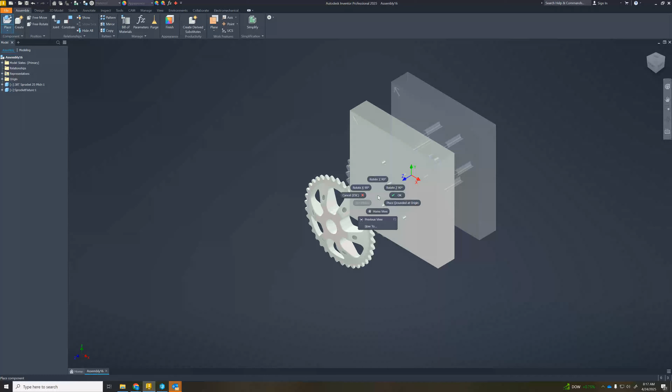In this video I'm going to go over the second side, or the second setup, of the sprocket. To do this I'm going to make a new assembly and put in the fixture and the sprocket, then constrain them together. Before I constrain them, I'm going to ground the fixture itself.

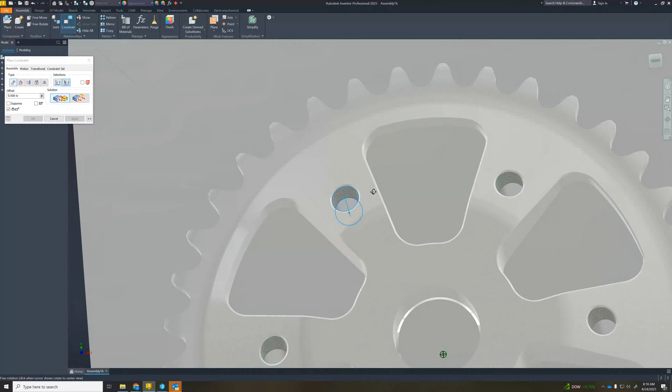Then I'm going to constrain the sprocket to the fixture, and I want to clock it properly, so I want to make sure one of the axes for this hole is lined up with the hole in the fixture itself. Now this would be held down by screws from the bottom - button head or socket head screws going in through the bottom, threading into the stock material we machined from setup 1.

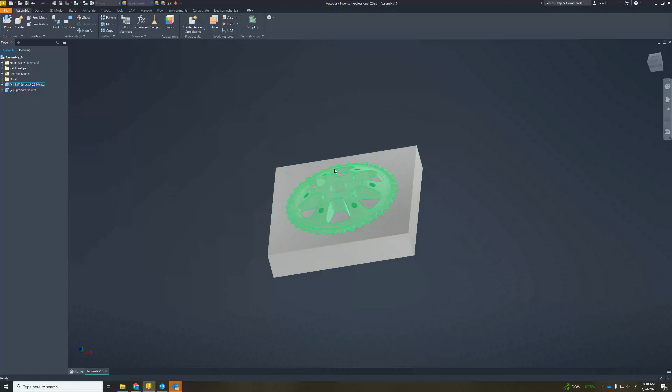Now that I have that constrained, we can go to the cam tab and get our setup. First thing I'm going to do is select the model here and the fixture.

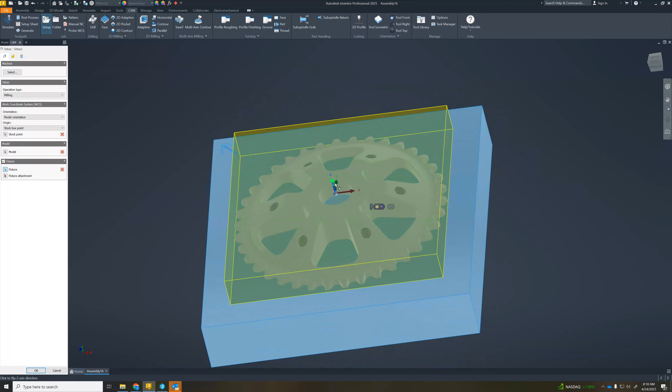Then I'm going to select the origin. For here I'm going to select the origin on the Z to be on the surface of the fixture plate, but the origin is centered on this little circle here. So I'm just going to select the point, making sure I select the right point. Looks like that's it. We can confirm by looking from the side - yes, that's at the surface of the fixture, and it's at the center of that post, because we can probe off of that center boss there.

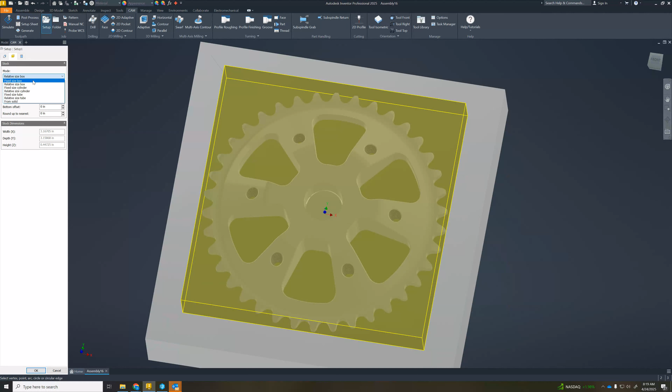Next thing I'm going to do is set up the stock. I'm going to do a fixed size box - if you remember, it's 4 inches by 4 inches. The original stock was a half inch thick, but on setup 1 we faced off 20 thousandths, at least that's what I did, so I'm going to make this 0.48 inches to compensate for that 20 thousandths that was taken off.

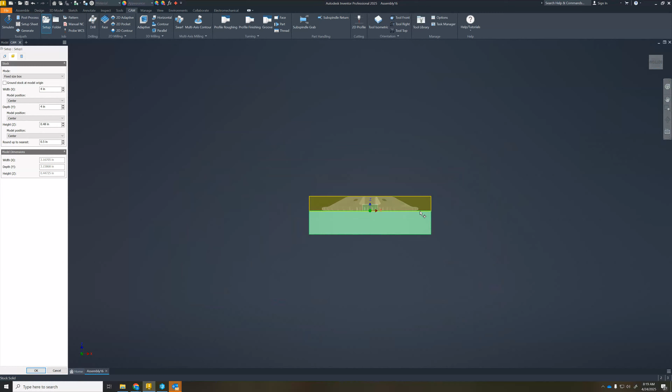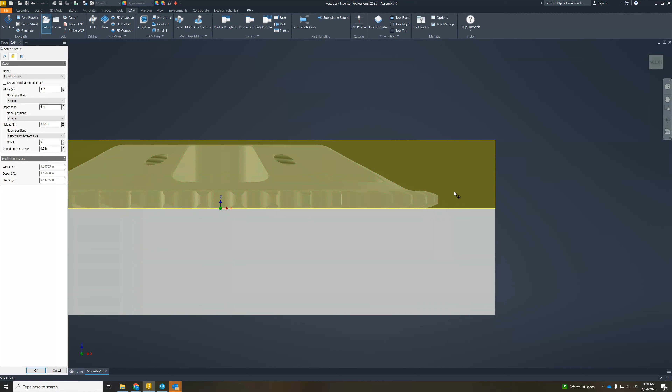Now what we want to make sure is that the stock doesn't go into the fixture, so instead of having the model centered in the stock on the Z, we're going to offset from -Z and set that offset to 0 to make sure the stock is resting atop there. Now this isn't a realistic stock because we already machined a bunch of material all the way to this part, but basically this will be sufficient for us to machine the other side.

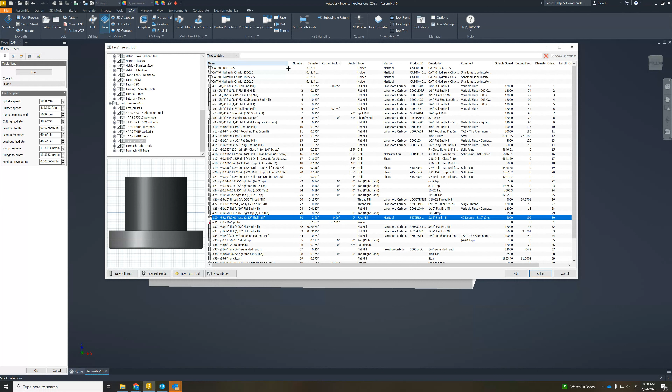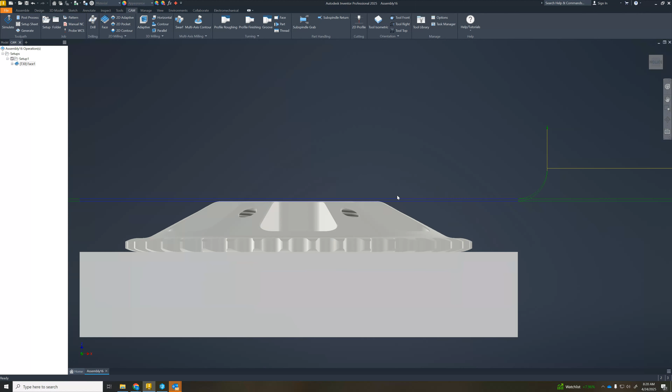So now that I have the stock done and the setup done, first thing I'm going to do is just face the top. To do that, we're going to use the facing tool from the VF3 library, which is tool 30 - that's the shell mill there. I'm going to select that and set the maximum depth at 20 thousandths. That's it - I don't like to take off more than that on the shell mill, so we'll go OK, and that will face that down. You can see that we have now faced to the surface there.

Next thing we need to do is clear out all this material with an adaptive, and then use a ball end mill to come down to get that shape. But remember, all of the holes have been machined from the other side, and all of these cutouts have also been machined from the other side.

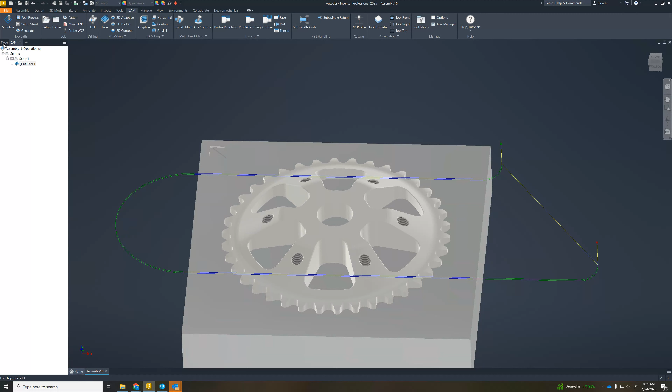So what we're going to do is go to the model, go to the actual sprocket, and edit the sprocket - you can double click on it to edit it. What we're going to do is suppress a lot of the things. Like we did in the last one, we're going to suppress the teeth. I'm hitting Control, left click, so I can select multiple things. I'm going to suppress this extrusion and the fillet that goes with those, and the pattern of that.

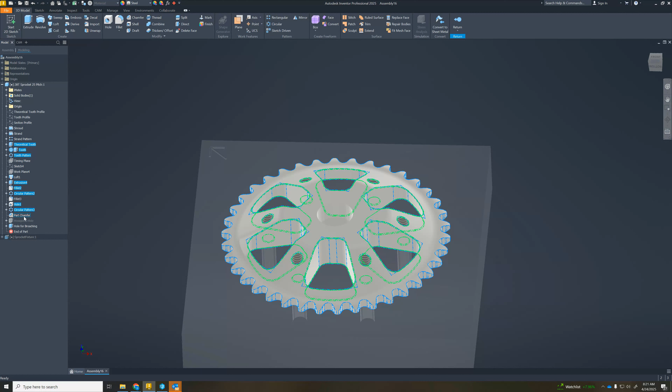I am not suppressing that because we want that, but I am suppressing the holes and the pattern of the holes, and the chamfer that goes with that. So suppressing all of that. You can suppress the center hole, but I don't think it's necessary because we're only using the ball end mill and the adaptive on this area here.

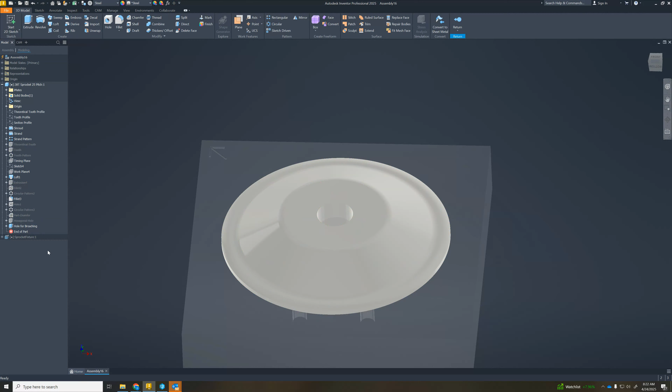We're not going to do the top because that's already been faced. So once I have all those selected, I can right click and go suppress features. So that's what we're left with here.

Now we can go return - you will get an error, and the reason why is because if you remember the original constraint, we had one of those holes constrained with the holes in here. Now those holes are gone and it's complaining. Just go accept, you should be all right. And that's that error - that hole no longer exists for that mate, and so you can see that is complaining there.

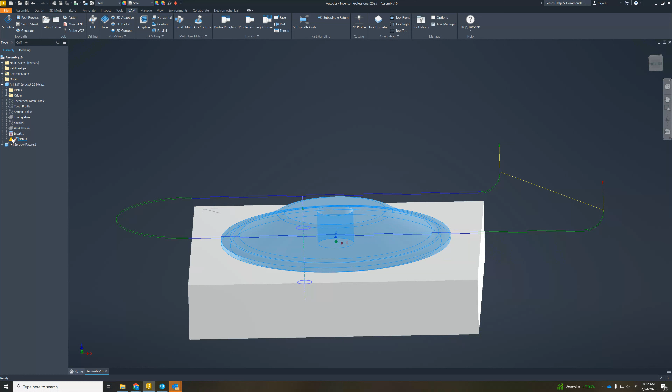We're going to go back to the cam tab, and we're going to go to a 3D adaptive. We're going to use the rougher, the 3/8 inch rougher. Right here, we can extend this out so you can see that's the 3/8 inch roughing end mill. I'm going to go select.

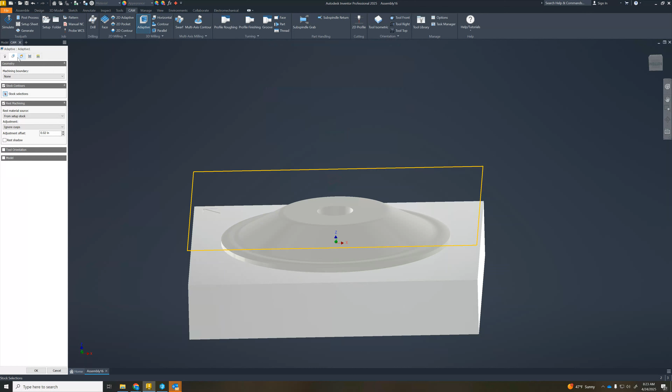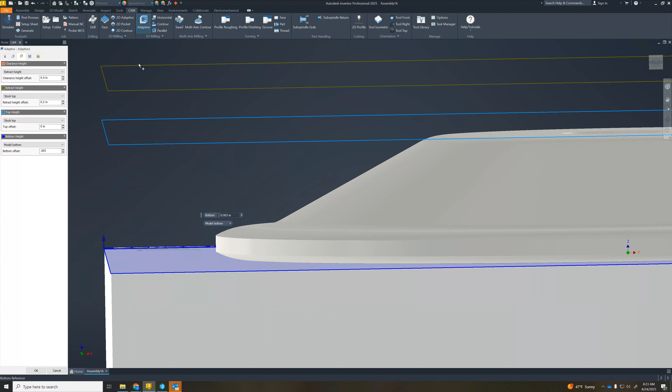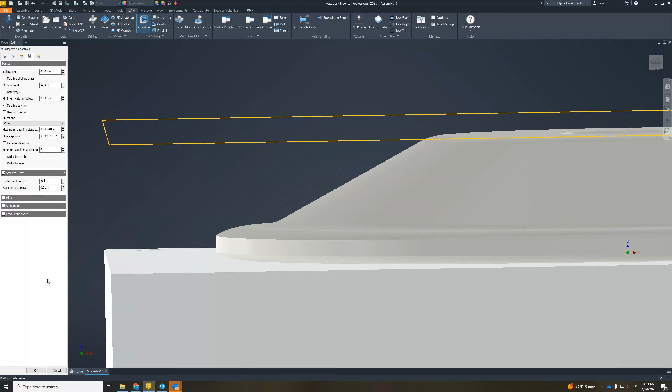Don't think we need to really change much. We have the depth at the bottom of the model. We could stay above that slightly because we've already machined up to this height from the other side, and I don't want to touch that, so let's stay above the fixture so we're not nicking it at all. We can keep that at 0 since we'll do the axial stock to leave. Let's change this to 10 thousandths, ensuring we stay 10 thousandths above this, and we'll leave 10 thousandths around the edge as well. I think that's all we need. Let's hit OK and see what happens.

See that we're stepping up, cleaning out all of that material with the roughing end mill. Now what we want to do is use the ball end mill to get this nice shape here.

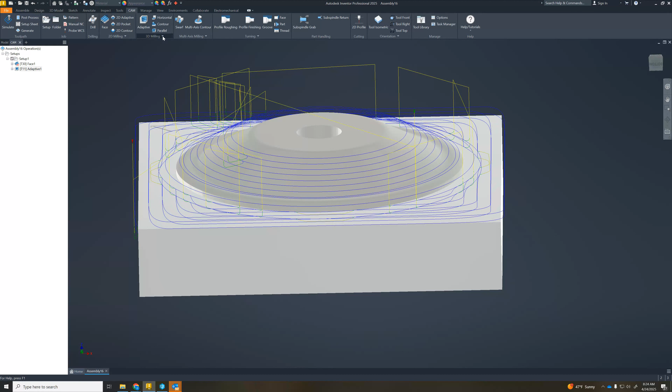To do that, we're going to go to our 3D milling and go to scallop. The tool we're going to use is a ball end mill. We can use the quarter inch ball end mill here, tool number 6.

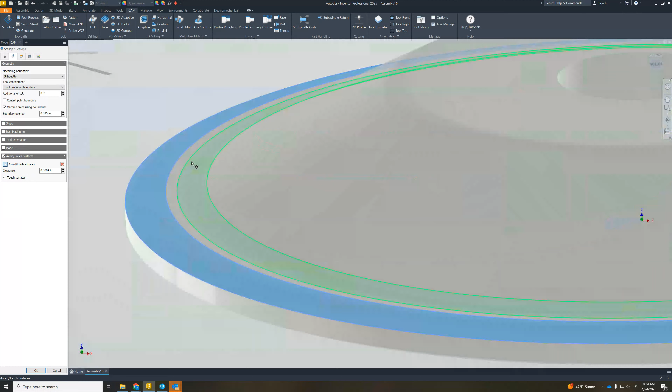Next we need to select what we want to machine, so I'm going to go to where it says avoid/touch surfaces. I want to touch certain things - this, this, and that. Remember, the top has already been faced, and we really don't go any further than that.

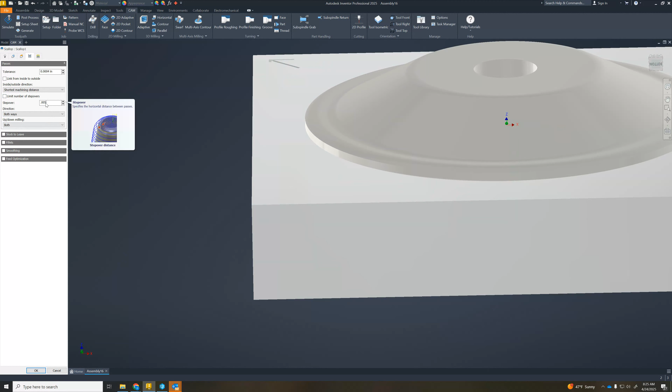Our bottom offset is what we've touched there, and then the step over - this is how fine of a surface finish you can get. We'll do 5 thousandths, which is a lot of passes, but it will leave a nice finish. If we wanted to make more of them and didn't care about that finish, we could change that to 10 or 15, even higher distances, but you would see the little ribs as we machined it.

So we're going to do that, scallop. You can see all of the passes it does as it cleans that up and makes that nice shape there. So now that we've done that, we need to go back and edit the model so we can do the chamfer and the machine cutouts.

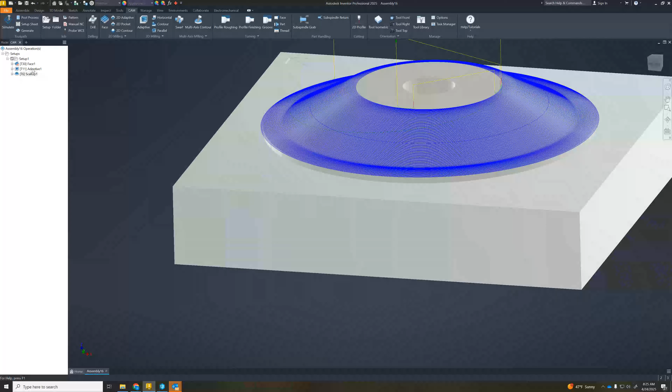But before we do that, I need to protect these two setups because I'm going to reopen or unsuppress all of those features on the model that I suppressed earlier. So I'm going to right click here and go protect. Sorry, I'm struggling here - protect, right there.

Now that those are protected, I can go back to the model and double click on the sprocket, and I'm going to unsuppress all of those things I suppressed earlier. So I'm selecting them all, then right click and go unsuppress, and go OK. Now we have that.

So now we can go back to the cam tab and get this little chamfer. To do this chamfer, oh I forgot to hit the return button, because I'm still editing the actual part. So I go return and this will become ungrayed out.

So now we're actually going to use 2D milling. We're going to use a trace, and the tool we're going to use is the chamfer mill. On the VF3 tools, I'm going to use the chamfer tool - I think it's tool number 8 there.

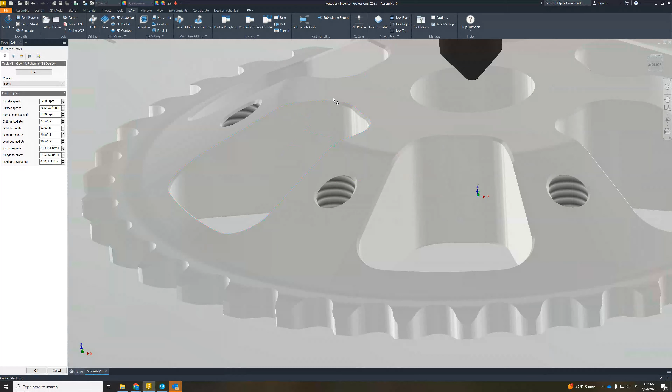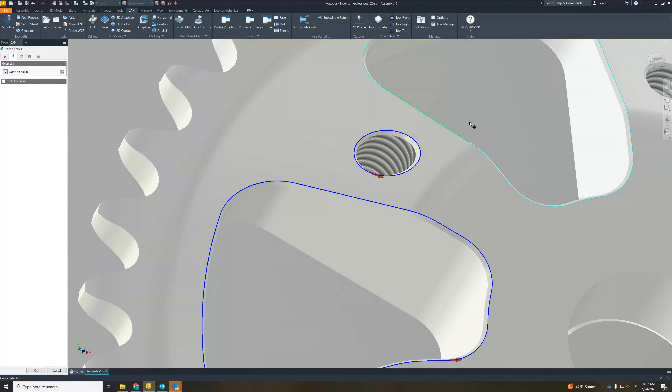Select - I'm going to select these edges here. Keep going around, making sure we select all of those. Now that I have all those selected...

I can go here and have chamfer. I'm going to do a 10 thousandths chamfer. We want the tip to be offset by at least 15 thousandths because the tip is flat there. Then one thing we want to do is change the compensation to the left, because a trace will follow that exact line, and we want the tool to be offset to the left of this line. So think about it coming here, we want to be on the left side of that.

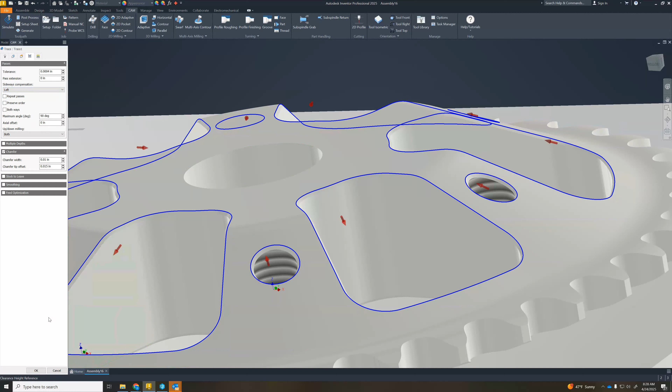I know my cursor's moving to the right, but consider the direction - if this is going this way, we want to be on the left side of that. So there we go. Then we can go OK.

And that will give us that chamfer mode. You can kind of simulate and see what that looks like as we go around and leave that with chamfer there.

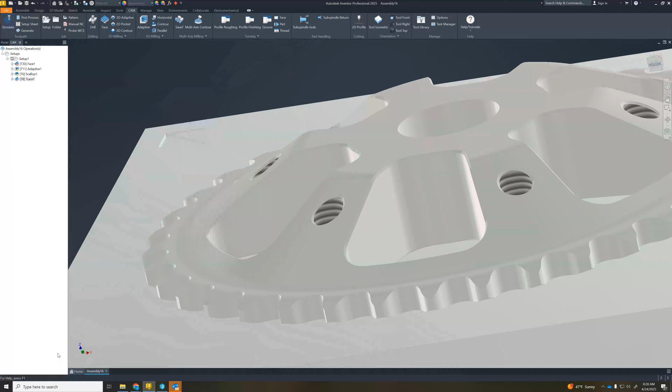So now that we have that, we're done. Now you might ask, well what about the teeth? Remember, we machined the teeth all the way to the full depth on the other side. All we really had to do on this side was get that scallop to get that shape. And so that should give us a complete part that can be then unscrewed, and we are done.

Now, the hole that I had in the model on the Google assignment is a hexagonal hole, and we would create that hole with a broach. We would not do that on the mill, and I'll demonstrate that in class. But that is it.